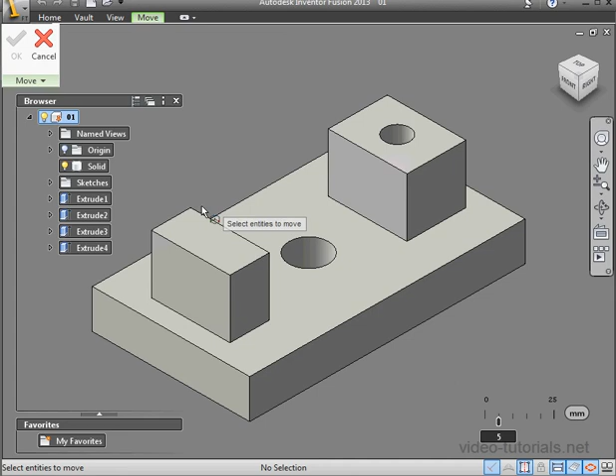Fusion interprets my request intelligently. The directions where movement is possible are indicated with bright colors, and the directions where movement isn't possible are grayed out. As you remember, I can grab and drag the face, and I can rotate the face as well.

When the rotation option is selected, I can click an empty space, and now we see the rotation angle right here. Let's reselect the handle.

Now let me show you how to set up a new anchor. Let's click on this arrow and select Re-Anchor. And for example, we can choose this face.

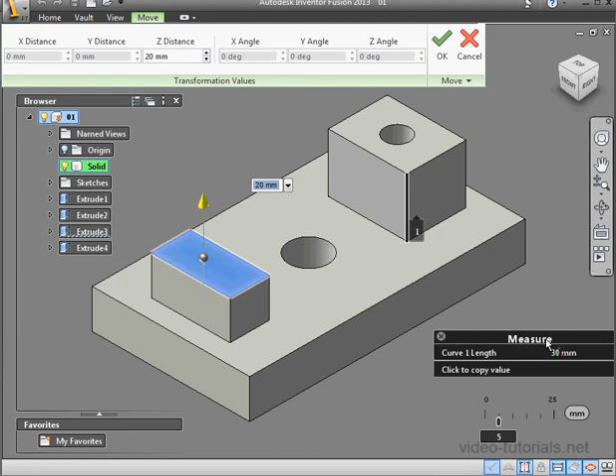Another tool we have here is the Measure tool. Let me select this edge. I see that it's 30 millimeters. So I'm going to select it, and now my face moves 30 millimeters from this face.

We've also got the ability to reorient the triad. I can select this edge here, and when you're done, click Finish Reorient.

Let me cancel out and restart the tool. This time, I'll select this edge. Now let's see what happens. I can also grab a face and move it in the planar direction.

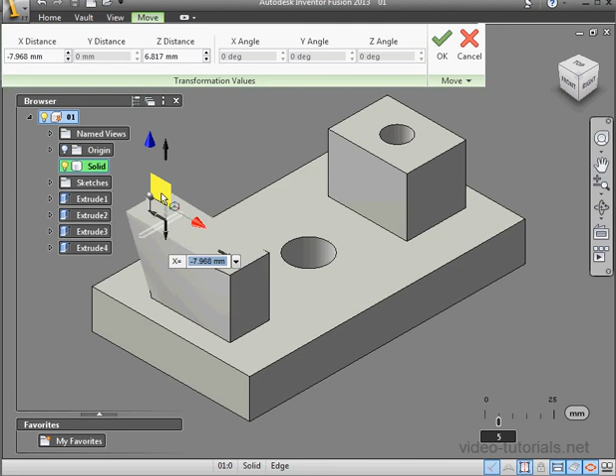Let's cancel out and restart the Move tool. I'll select this edge and Shift select these edges here. Now watch what happens. I'm able to move these four edges, however the circle in the center stays put. So as a result, I've deformed my top face, and this isn't what I want.

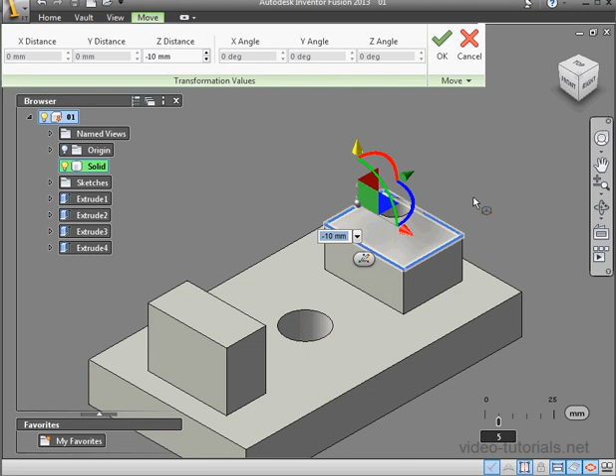Let's cancel out of this move operation, reactivate the tool, and now I'll select this circular edge. Watch what happens: if I try to move, I get an error message. When I click on it, I see what's wrong - Tweak edge operation failed. Basically, the geometry is too complex for Fusion to calculate.

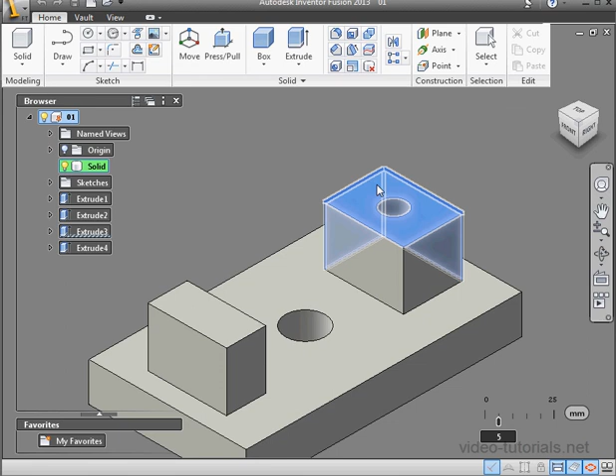Let's try it again. I'll select these four faces, deselect this one, and activate the tool. Let's move our extrusion. Notice that because I didn't select the hole in the middle, it stays put. And this concludes our tutorial about using the Move tool in Inventor Fusion.